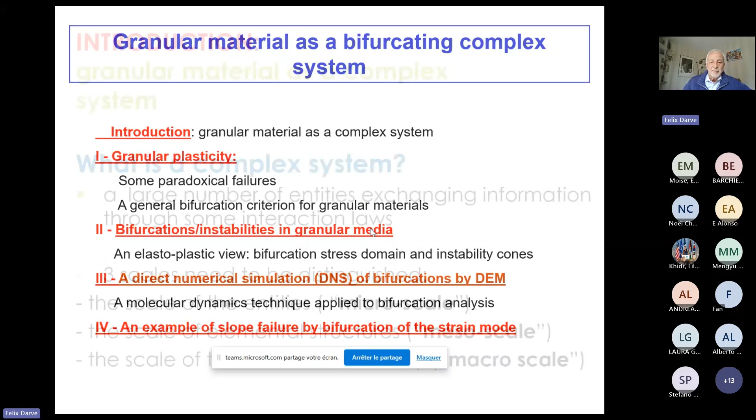So first, why is granular material a complex system? To begin, what is the definition of a complex system? A complex system is constituted by a large number of entities which exchange information through some interaction laws. Two points are important in this definition: first, we need a large number of grains.

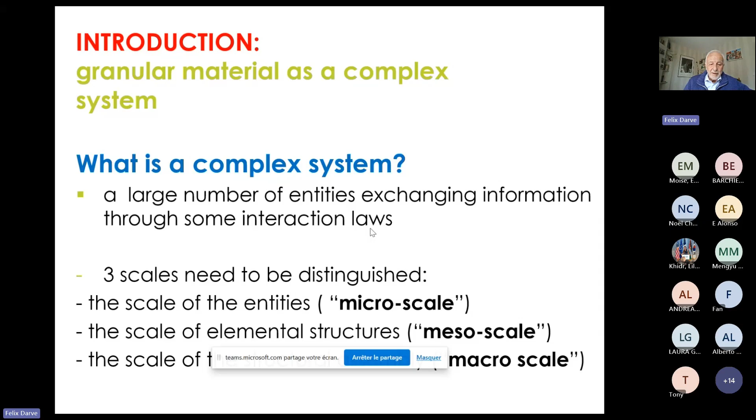And second, there is the question of information in its broad sense, as proposed by Shannon, for example. So immediately we see that three scales have to be distinguished in a granular complex system: the scale of the grain, the microscale; the scale of some structure constituted by 10 or 20 grains, the mesoscale; and eventually the global scale, the macroscale.

So at the mesoscale, we have some mesostructures typical of granular material: force chains and grain cycles. Force chains are constituted by grains more or less aligned, transmitting, roughly speaking, forces and stresses. Grain cycles are composed of closed loops of grains, essentially responsible for the strains, for the deformation.

And these mesostructures are continuously being selected. Only the strongest ones survive, and through this selection, they are adapting continuously. So, because of this continuous adaptation, collective macro behavior arises by self-organization. And finally, because of this self-organization, some macro properties are emerging. The important points here are the processes of selection, adaptation, self-organization, and emergence. And of course, a sand pile, roughly speaking, has extremely different properties.

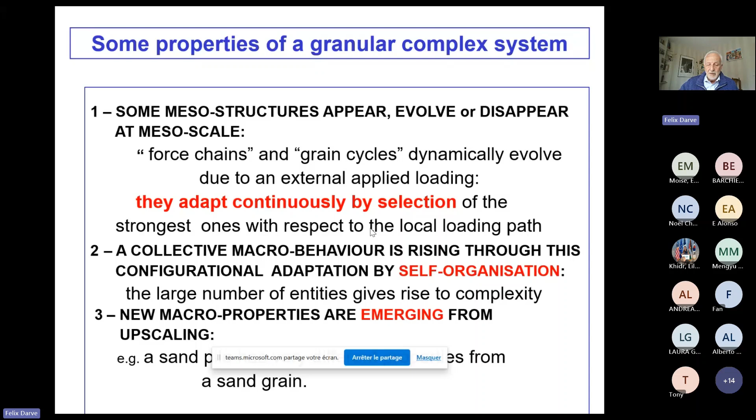This is obvious from a sand grain. So granular material is a paradigmatic complex system which is athermal—its behavior is fully independent of the thermodynamic temperature. This complex system is also atemporal, because physical time has no influence. This is a non-viscous material.

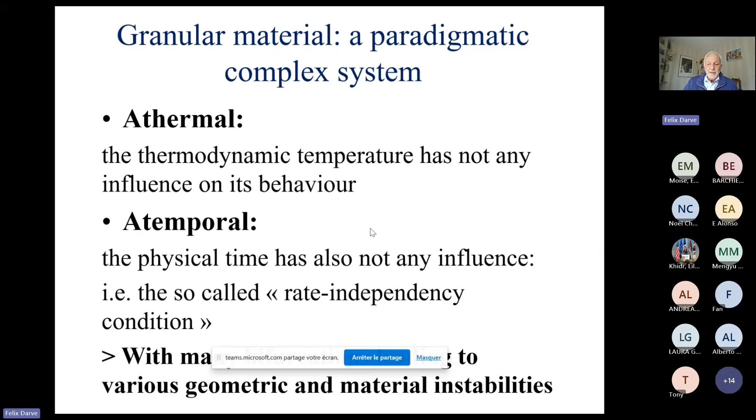So it is independent, its behavior is independent to the loading rate. And finally, this complex system is leading to bifurcation, induces different instabilities, and finally failures.

So, first part, after this introduction, a few words about granular plasticity. Here you have a general presentation of the classical view of plasticity. Plastic materials are rate-independent materials. It means that the incremental stress is a function of the incremental strain. Because of the rate independency condition, non-viscosity, the tensorial function F is homogeneous of degree 1.

We can apply Euler's identity and demonstrate the existence of an elastoplastic tensor linking d sigma to d epsilon. And because d sigma and d epsilon are symmetrical matrices, we can replace these matrices by vectors with 6 components. And in these new spaces, we have now a matrix M linking the vector d sigma to the vector d epsilon.

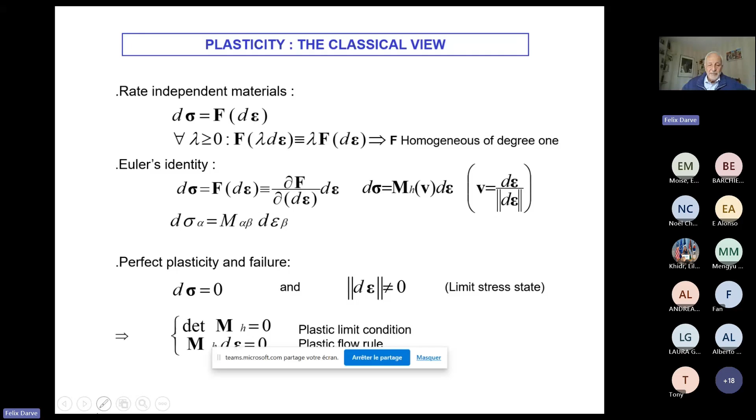This is what is called the plastic limit condition from a mathematical point of view. And in perfect plasticity, we have this condition, M d epsilon equal to 0, which is called in the classic theory of plasticity the plastic flow rule, giving only the direction of d epsilon because the determinant of M is equal to 0. But now we will see that according to experiments, the failure, the plasticity of granular material cannot be described in this classical plastic framework.

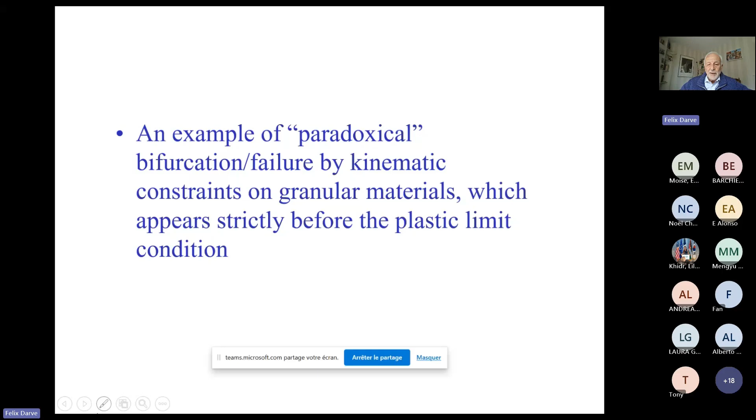But if you perform now the same test, axially stress controlled or axially force control, of course, you will have a sudden failure at the maximum of Q peak. But at Q peak here, the determinant of M is strictly positive. The determinant of M is vanishing on the plastic limit condition. So classical plasticity cannot describe this kind of failure.

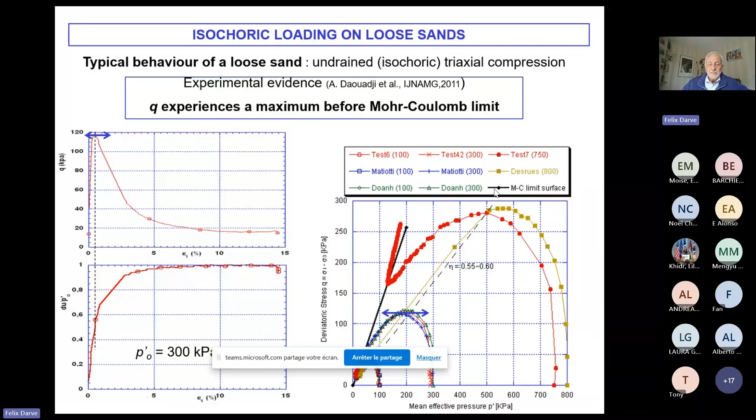So we can consider what is called the second order work criterion, which is the scalar product of d sigma by d epsilon. In axisymmetric condition, in principal axis, this second order work is taking this very simple expression here. And if we take into account the isochoric condition, constant volume, the second order work is just equal to dq d epsilon 1, where Q is the deviatoric stress.

So this, the vanishing of this second order work can describe the peak of Q, and we will see immediately that this instability condition, the vanishing of second order work, can describe this Q peak, this deviatoric stress peak, which is not described by the classical plasticity.

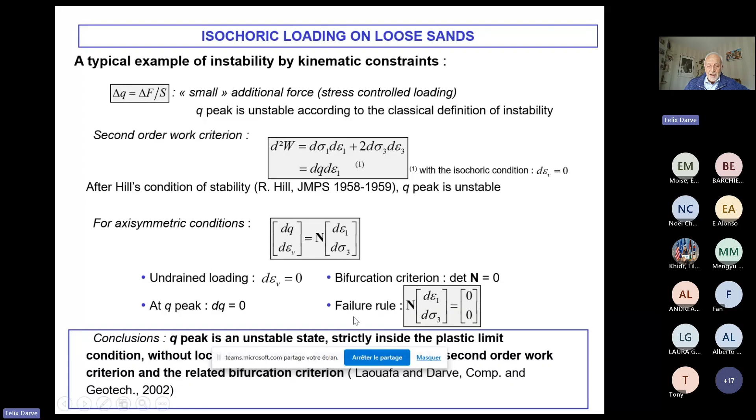And now, if I write the elastoplastic relation like that for axisymmetric condition, that's possible for any kind of elastoplastic relation. You see that for an isochoric condition, d epsilon v is equal to 0, and at Q peak, dq is equal to 0. So you have a bifurcation criterion here, the vanishing of the determinant of this matrix N, which is generalizing the plastic criterion, and a failure rule, which is generalizing the notion of flow rule.

So just a few words about this second order work criterion, equal to the scalar product of d sigma by d epsilon. According to Hill, this is a sufficient condition of stability if this scalar product is strictly positive for any d sigma and d epsilon linked by the constitutive relation.

And now, if I introduce the elastoplastic relation in this expression, I obtain a quadratic form with respect to the elastoplastic matrix M, and according to linear algebra, a quadratic form depends only on the symmetric part of the elastoplastic matrix. So the second order work can vanish when the determinant of MS is vanishing or taking negative values for the singular domain of MS.

I don't want to enter into technical details, but just keep in mind that for associated elastoplasticity, like for metal plasticity, generally speaking, the elastoplastic tensor is symmetric. So the plastic limit condition and the stability condition coincide exactly for classical elastoplasticity, for associated elastoplasticity, like for metal.

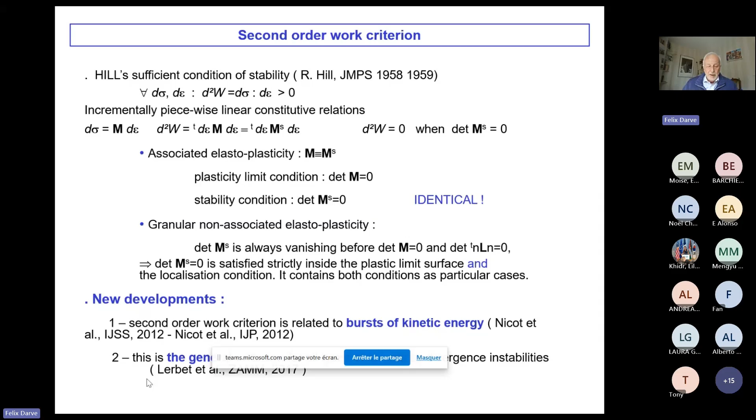New developments have been proposed in recent years. First, it has been shown by François Nicot that the vanishing of second-order work is linked to bursts of kinetic energy, as we see in failures of granular materials in the lab, but also in situ. We observe always this burst of kinetic energy, and we now have a general proof of the link between the second-order work criterion and divergence instabilities, proposed by Jean Lerbet using a variational method.

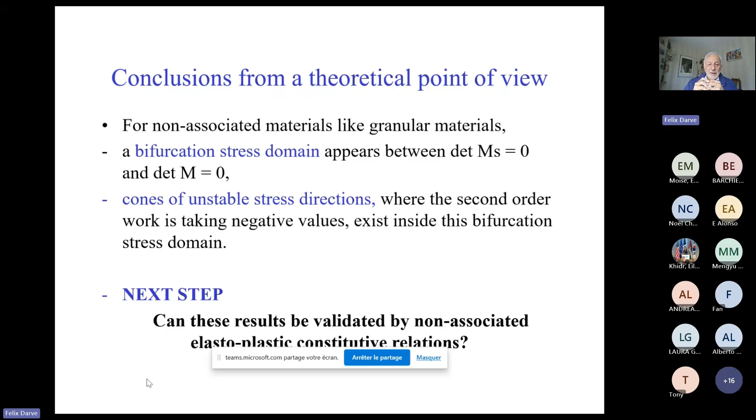So briefly, the conclusion from a theoretical point of view: for non-associated materials like granular materials, we have a bifurcation domain, and in the vanishing domain of this quadratic form, according to linear algebra, we have cones associated with the vanishing or negative value of the second order work, and for us this means some unstable direction.

So let us now check these results with the elastoplastic relation. This is the simplest case, the case of axisymmetric condition, and in order to check various directions of the incremental loading direction in the strain space or stress space, I will consider this class of proportional strain paths associated with various values of R.

According to the second order work, the new expression for this class of paths of second order work is given here. We can write now any kind of elastoplastic constitutive relation like that, and at sigma 1 minus sigma 3 over R peak, we have this kind of condition.

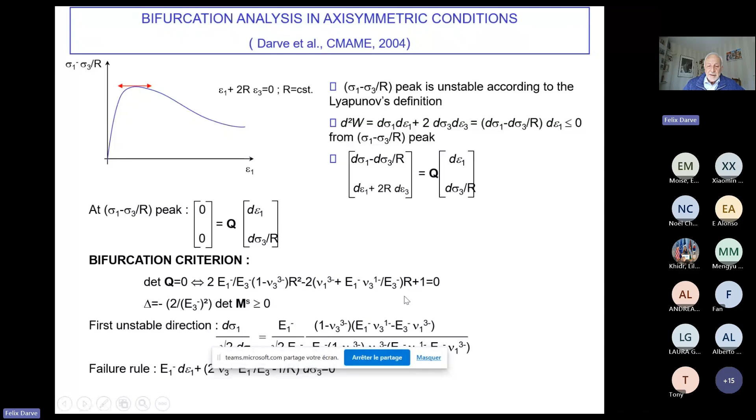So the bifurcation criterion is given here, and in this simple axisymmetric case, when the discriminant of this equation of second degree with respect to the direction is positive—meaning the determinant of the symmetric part of M is negative—we have two values for R. It means a cone of unstable direction.

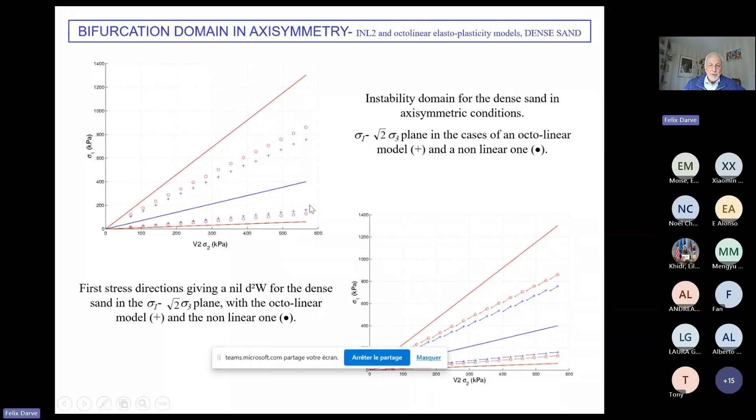The first point here, the crosses, correspond to the first point where the determinant of the symmetric part of M is vanishing for this constitutive relation. So we have a large bifurcation domain between this red line in compression and this point. This whole domain here is a bifurcation domain in compression, and in extension, this domain here.

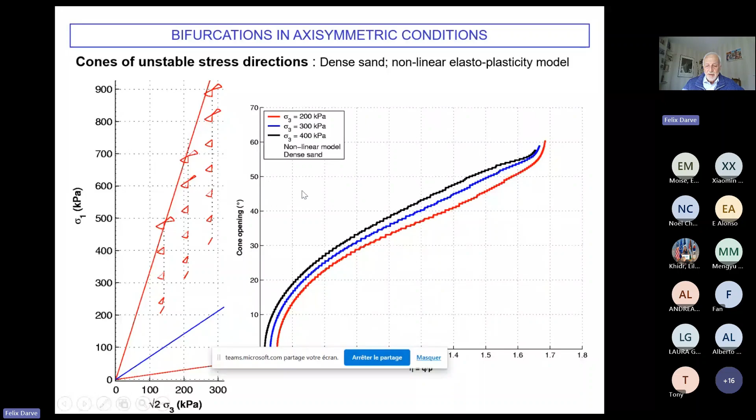Here you have the cones of unstable direction, and you see that for this elastoplastic model, we have a second cone of unstable stress direction, which is emerging close to the plastic limit condition of Mohr-Coulomb. This is indeed possible from a theoretical point of view.

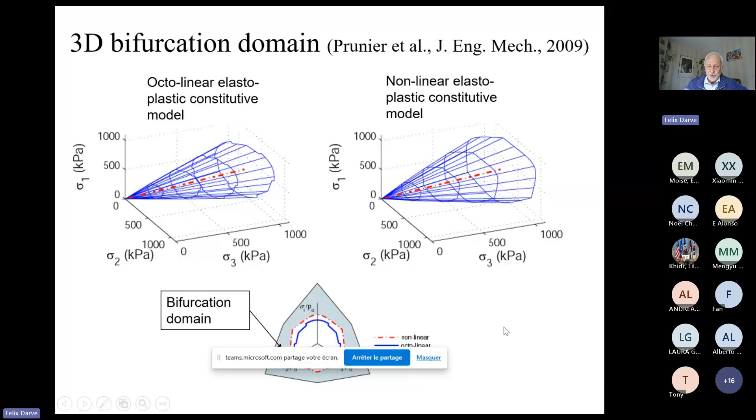Here this is the trace of this bifurcation domain in the deviatoric stress space. And here you have the cones of unstable stress direction close to the plastic limit condition.

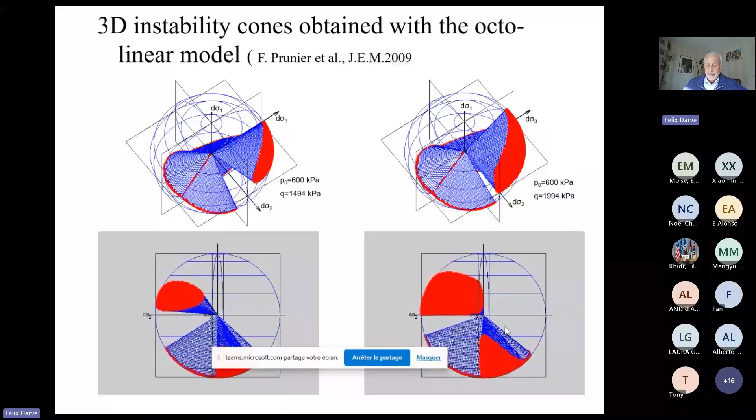We see this because we have an incrementally nonlinear elastoplastic constitutive relation—I will not discuss this technical point. We have several cones, which means that the landscape of bifurcation, of instabilities, of failure, close to the plastic limit condition, generally speaking in the bifurcation domain, is quite complex.

So to have an effective bifurcation, we need to apply incremental loading in this unstable cone of instability, and we also have to consider proper mixed loading parameters.

So when these conditions are fulfilled, and this is the case in many practical situations in situ, once more for earthquakes, for landslides, and so on, we will have this kind of bifurcation leading to catastrophic failure not described by the plastic limit condition. The important point is, of course, that the classical plastic limit condition cannot describe all the bifurcations, all the instabilities, all the failures for granular material.

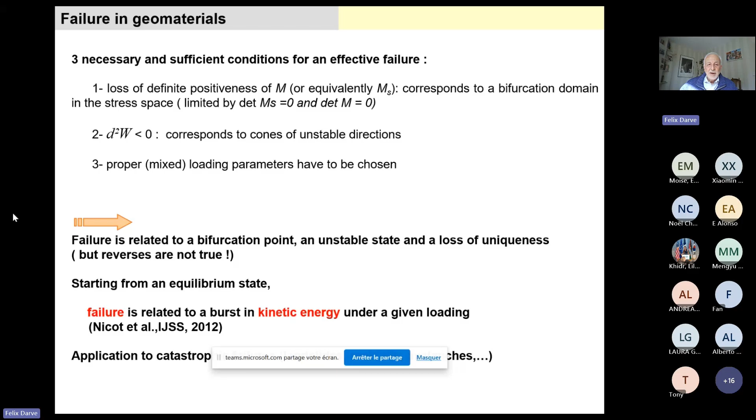So we have seen some experimental results at the beginning. We have seen some brief theoretical development introducing the second order work criterion. We have obtained some results by applying this criterion to some elastoplastic constitutive relation, but we have not seen an effective failure. We have just seen that we have a bifurcation domain, we have cones of instabilities, but now we have to check if we have effective failure inside these cones.

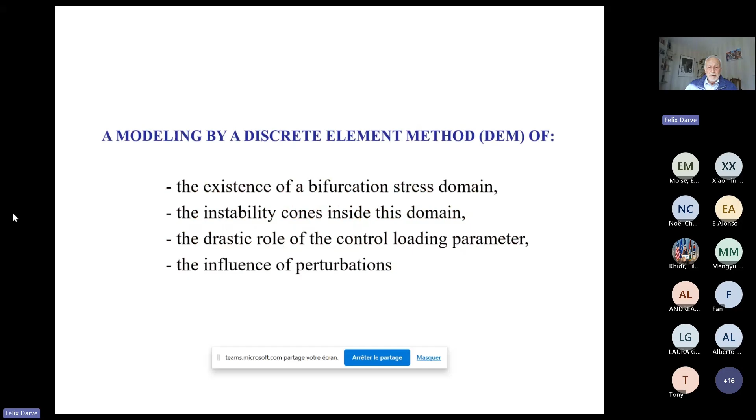For that, we need to use direct numerical simulation, what is called DNS, and for granular material, the most known direct numerical simulation corresponds to the discrete element method. With this discrete element method, we will check the existence of this bifurcation domain, the instability cone, the question of the loading parameter, and because we have some bifurcation, this bifurcation will depend on perturbation, and we will see that also.

So here, just a brief presentation of the discrete element model, which is constituted by 10,000 spherical particles in a cubical sample. The interaction law between the grains is extremely simple: an elastic stiffness in the normal direction, and a tangential elastic stiffness in the tangential direction, with a friction angle, the well-known Coulombian dry friction, limiting the tangential force by this friction.

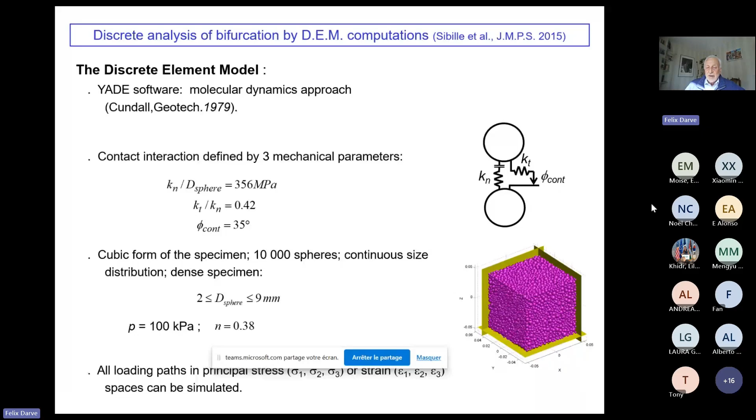So the first question was, is it possible to obtain these cones with this discrete element method, which is, of course, a method fully different from phenomenological elastoplasticity.

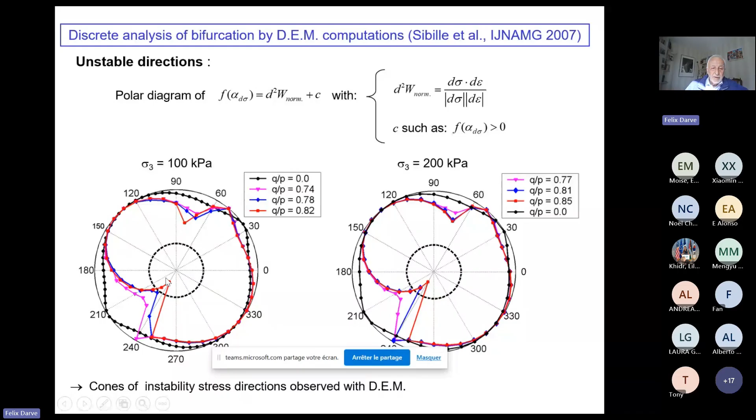So you see that according to DEM, we have this cone of loading directions corresponding to negative values of second order work. Of course, at the beginning of the loading, close to the hydrostatic axis, the second order work is not taking negative values. We have to enter inside the bifurcation domain to obtain this cone of unstable stress direction.

Okay, now we have this cone, but is it possible to obtain a failure inside these cones? So we consider all these directions, all these values of R corresponding to incremental loading directions in this stress space. We have here the cone of unstable direction. Some directions are outside of the cone, some directions are inside the cone, and here both these directions are just at the border of the cone.

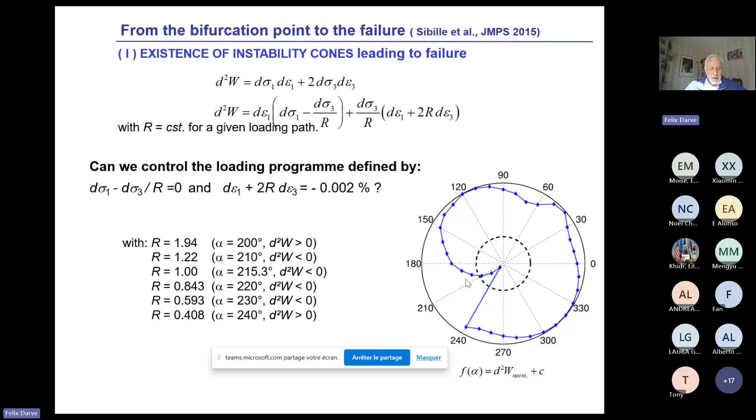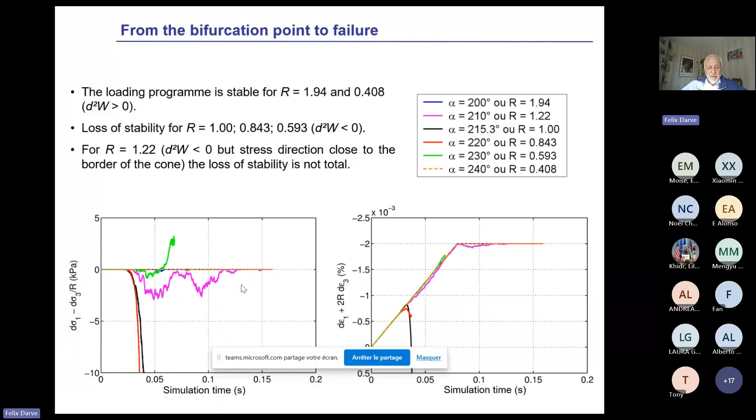Very interesting. Okay, this is for the same condition - the exponentially growing strain, nothing, not any variation outside of the cone, and this erratic, chaotic variation at the border of the cone.

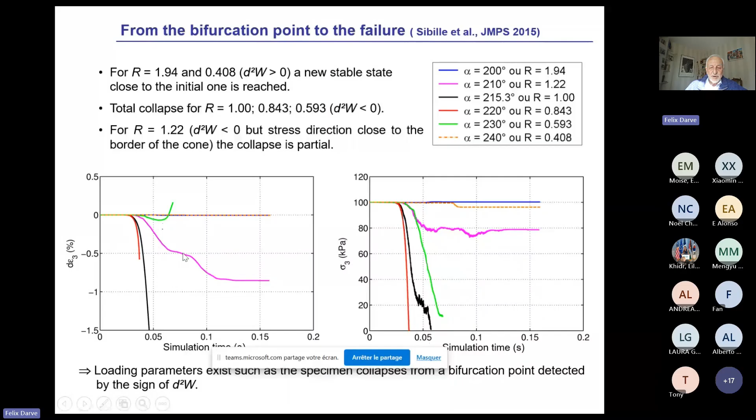Now the question of the control loading parameters. For that, we have considered one particular direction inside the cone, a constant deviatoric stress for axisymmetric conditions. This kind of loading direction is interesting because in practice, for landslides or for earth dams, this is a loading direction which has been effectively observed in practice in slopes or inside earth dams.

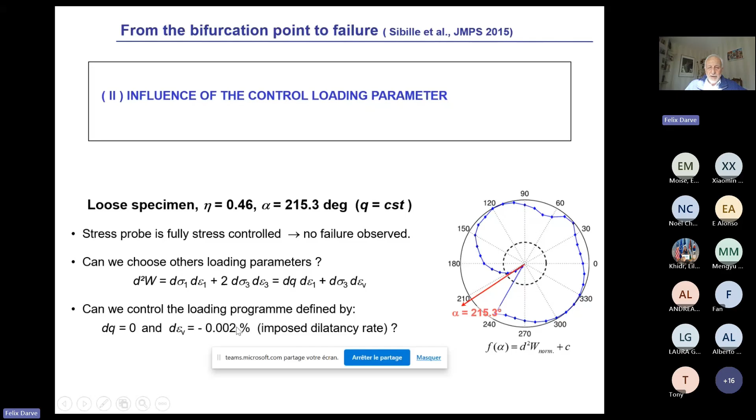So we will consider different loading parameters. First, a loading path which is fully stress controlled according to the theory. For these stress control paths, the stability is maintained. And still according to the second order work theory, if we have this mixed loading - control on the deviatoric stress, which is maintained constant, and control on volume variation, applying negative values.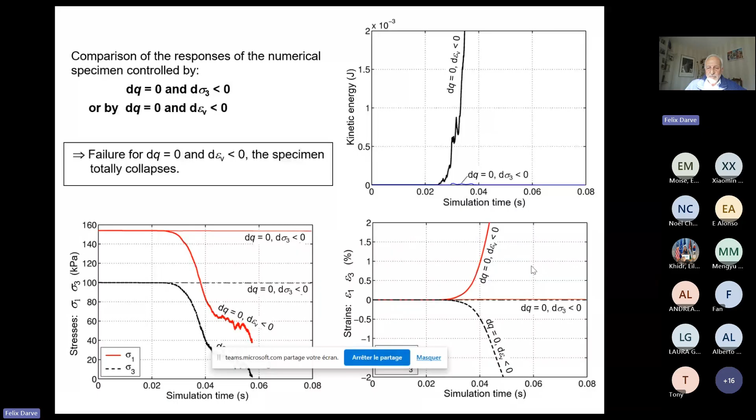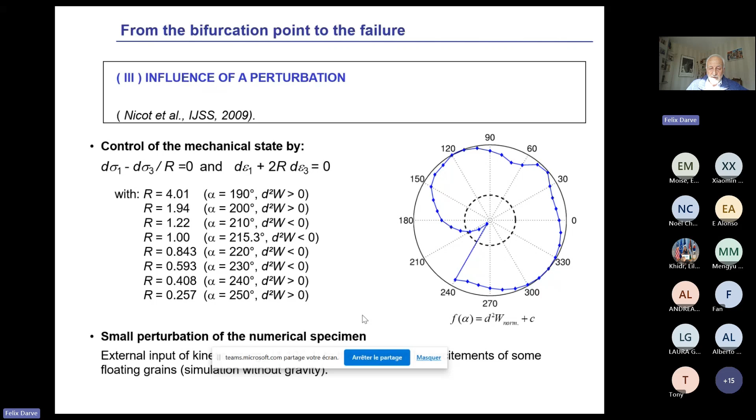Finally, the question of perturbation. We consider this state by imposing loading conditions, which can be stable outside of the cone, unstable inside the cone, and so on. We apply a small perturbation to the specimen by giving some velocities to the floating grains. The simulations by DEM are performed without gravity. So among the 10,000 spheres, we have always some very few floating grains.

Here you have the results for this perturbation. Outside of the cone, more or less nothing happened, just a small variation of the kinetic energy. Inside the cone, a sudden burst of kinetic energy and non-controllable stresses. And at the boundary of the cone, this chaotic variation.

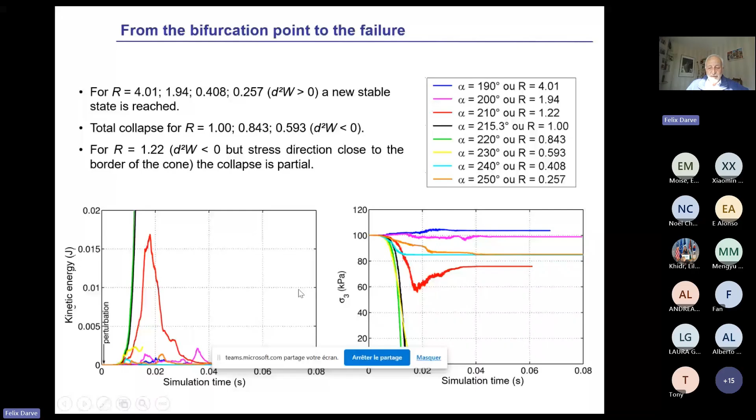Okay, so the second order work criterion has now been properly validated by discrete element method, by direct numerical simulations. So indeed, we have proper failure, proper bifurcation inside this instability cone, inside this bifurcation domain.

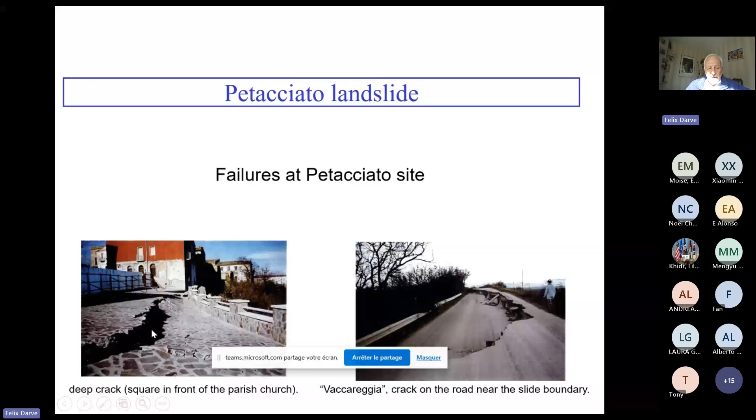Now I will finish this talk by considering the example of an Italian slope failure, a very known landslide in Italy. You see that this is a landslide with a large failure, large displacement. This site is along the Adriatic coast. This is a very large landslide, 7 kilometers here, more or less 2 kilometers here, and this is a dramatic landslide because you have some villages, some roads, a motorway, and so on.

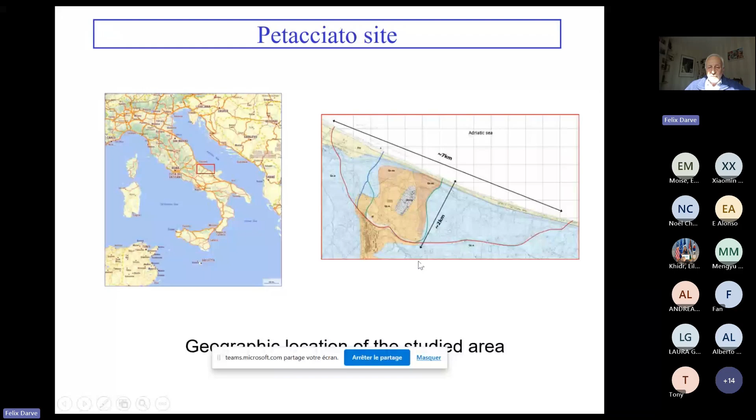So this landslide has been extremely well studied, and a large European research program has been devoted to analyze this landslide. And this landslide was considered as fully unexplained by a classic Mohr-Coulomb criterion, because you see that the slope of this landslide is extremely low, 6 degrees. It is not possible, of course, to explain such a landslide with a Mohr-Coulomb, with a classical plasticity criterion, the Coulombian criterion, for which a slope is unstable, let's say for 25 or 30 degrees.

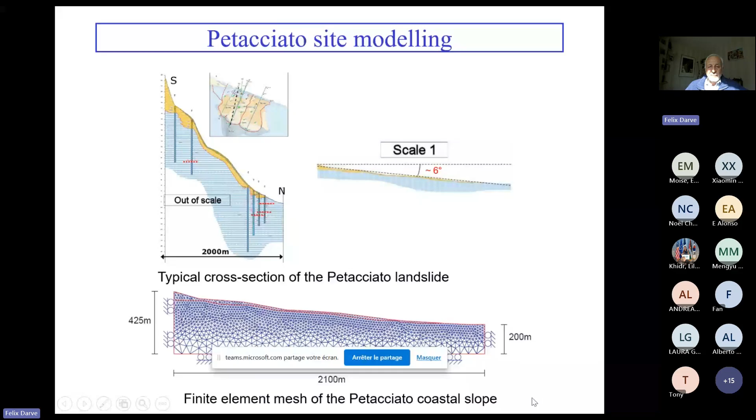So in the framework of this European program, we have applied a finite element model. You have here at the bottom the mesh of the finite element model. We have applied our second order work criterion. Here you have the loading program. First, the soil is dry. Then we have increased the water table level because in practice this landslide was effective after strong rainfalls.

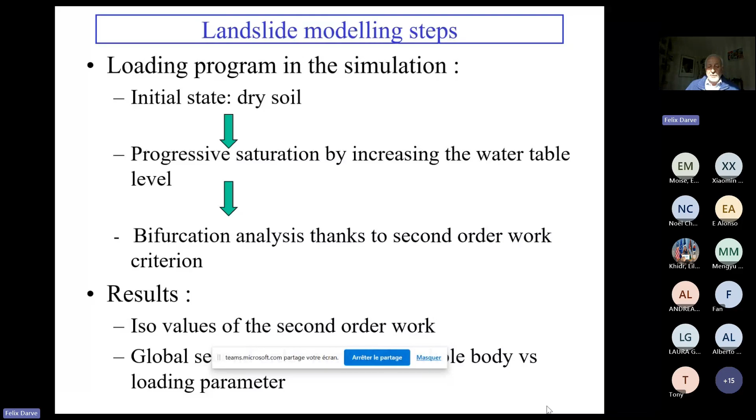So, of course, the water is responsible for the instability. And we have calculated, in each point of the mesh, in each material point of the mesh, the local value of the second order work, and also we have considered the global value of second order work. I have not discussed this second point, but the integration of the second order work is linked to a global instability factor. Okay, here you have the result.

In blue, this is the increasing water table level. And you see that when the slope is fully saturated, it means when the water table level is reaching the free surface, according to the local value of the second order work, this part of the slope is potentially unstable. Once more, with the classical plasticity analysis, this slope was considered as perfectly stable, in contradiction with the observation.

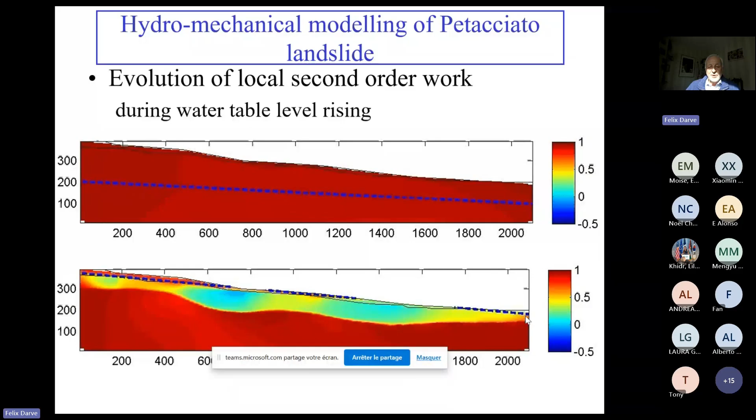Okay, here this is the global value of second order work. The effective bifurcation, the effective instability, the effective failure correspond to the vanishing of the global second order work. Here you see we are very close to describing the effective failure, and indeed at this point the finite element computation was no more converging, so we have not been able to continue the loading. But you see that the global second order work is a very good indicator of failure.

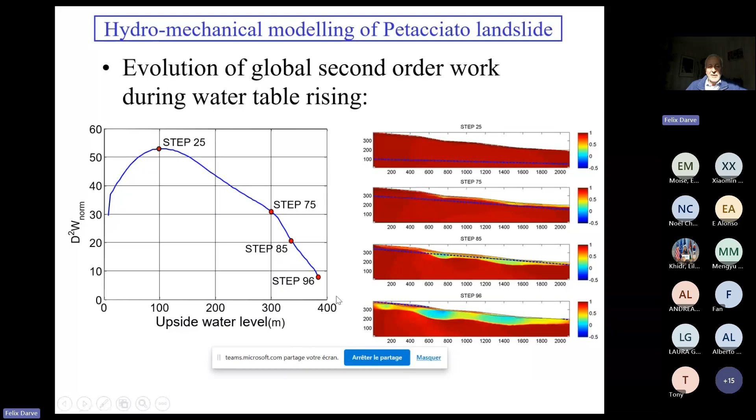Okay, that will be my last slide with some conclusions. First, granular media are perfect complex systems with some specificities, and an important feature is this non-associated plasticity, leading to non-symmetric constitutive matrices, and this non-symmetry is, as we know, generally speaking in physics, leading to various bifurcations. We have first observed these bifurcations on experiments. We have a theoretical proof by variational methods. We have seen what kind of results can be obtained by elastoplastic phenomenological relation, and validated also all that by direct numerical simulation.

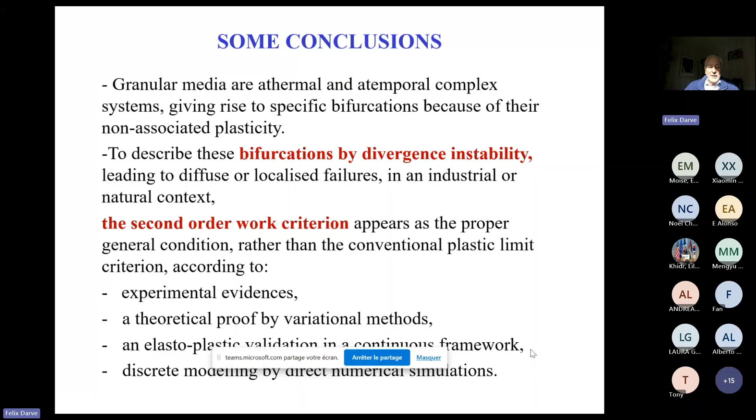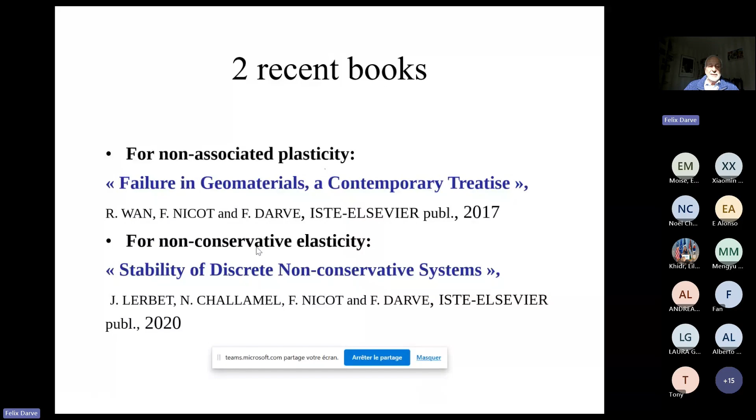And if you want to have more details about all that, the first book here is considering granular material with non-associated plastic behavior, but the same kind of reasoning has been developed for non-conservative elasticity. And we know that for non-conservative elasticity, the elastic tensor is no more symmetric. The same reasoning with the second order work criterion can explain the paradoxical instability which have been observed for some non-conservative elastic structures. So thank you for your attention.